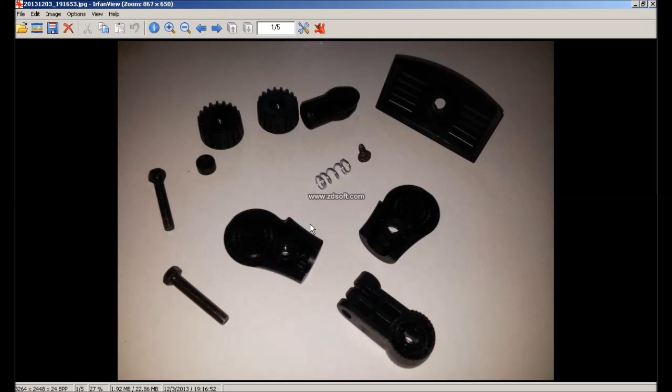So our top assembly here, as shown in this image. So we have these components for our top part assembly: a right gear connector, left gear connector, middle gear connector, bolts, a cap, a spring, a compression spring, a screw for this mounting plate, a mid slot, and two knobs here.

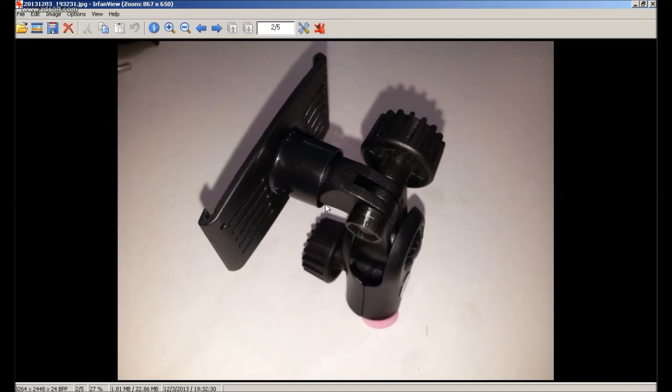So this is the view for the top part assembly. This is another view. So we have an assembly of the top parts. Inshallah in this video I will show you how we make an assembly for the top parts.

So as usual, we open our SolidWorks. When we open a new document, we go for assembly, then we click OK. When we open a new file for our assembly, initially we've got to insert our main component first.

Before that, let me show you the image for our assembly. Since at the bottom here we have two casings, left gear connector and right gear connector, I will use the right gear connector as our base component. So this will be our first component in our assembly.

The first thing I should do is insert our component. The first component will be our right gear connector. So this is our right gear connector. Since this is our base component, we don't click it on the screen, we simply click OK. So this base component will be put into the origin point of the SolidWorks assembly file.

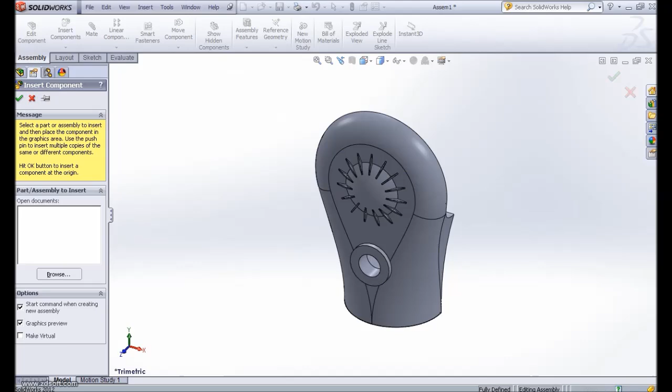The next thing to do is we insert all the other components. The next component will be our left gear connector. So let me check, we have a left gear connector here. So I put it somewhere around here, until we get all the components inserted as shown in this image. Okay, we have all this component, we will insert all this component.

In this video session I will not show you the compression spring now, I will show it during the assembly process, how we create a new file called compression spring so it can be nicely fitted into the assembly. Okay, so we've got to insert the other components.

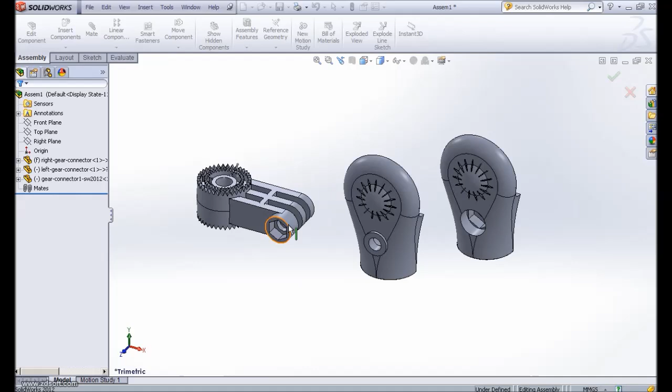After I've inserted the components, firstly my first step is I insert only 3 components first, the 3 components relevant to our initial assembly. After we have inserted these three components, let me do some assembly for these 3 components.

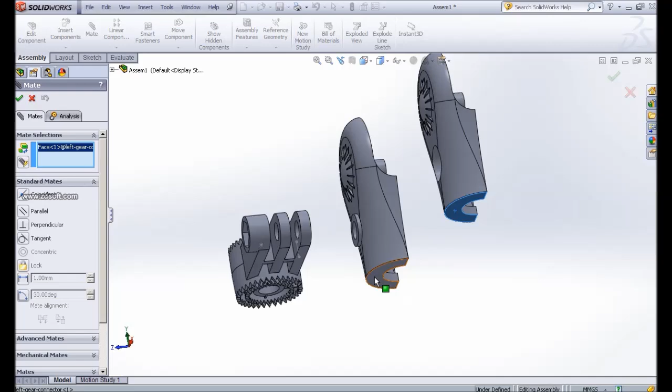Since our right gear connector here is my base component, what we will do is go to mate, then select these faces of this left gear connector and this right gear connector. Automatically SolidWorks will set it into coincident, meaning the bottom surfaces will be on the same plane. So then we set it first.

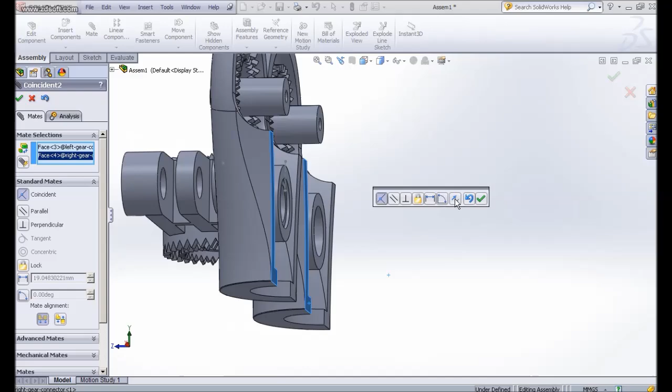The next mate setting will be, I select this vertical face of the left gear connector and this vertical face of the right gear connector. SolidWorks will set it automatically to coincident, but we also need to click the flip mate alignment, or we can click anti-align. What I will do is click flip mate alignment, so both components will share the same horizontal and vertical plane, and this component is now flipped into the right position.

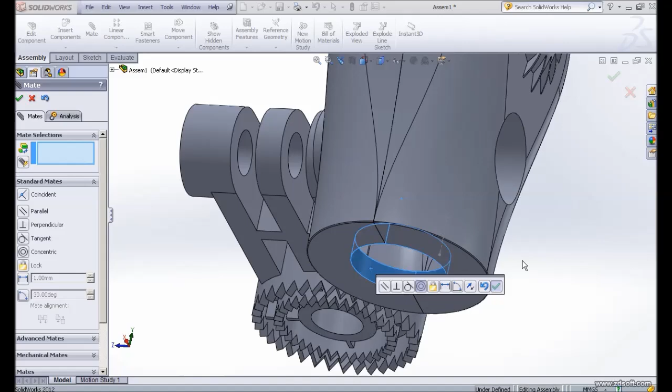Then I click OK. My next setting is I select this cylindrical surface here and the surface of our right gear connector, so automatically it will be set to concentric mode. Then we click OK, and our two components here are assembled into the right position.

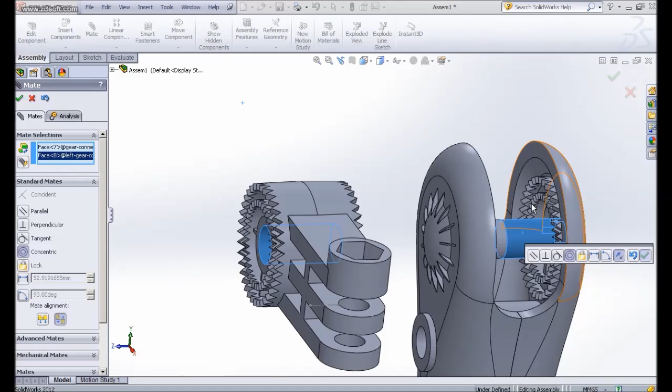Okay, next when we zoom in, here we have our middle gear connector with external teeth. In our casing, the right gear connector has internal teeth, internal gear. So we've got to mate this gear teeth to the right position.

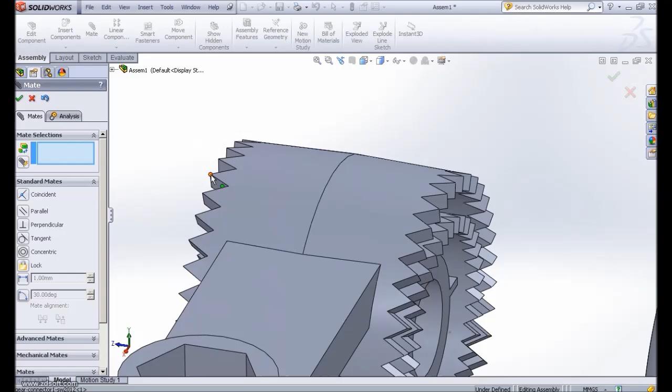So for this middle gear connector, I will select this point - not the edges, but the vertex, the point. This point is at the peak, not at the bottom of the gear. If we zoom closely to this gear, let's put it at this point, so it will be in this vertex.

Automatically it will put into coincident, so the gear will be in the right position there.

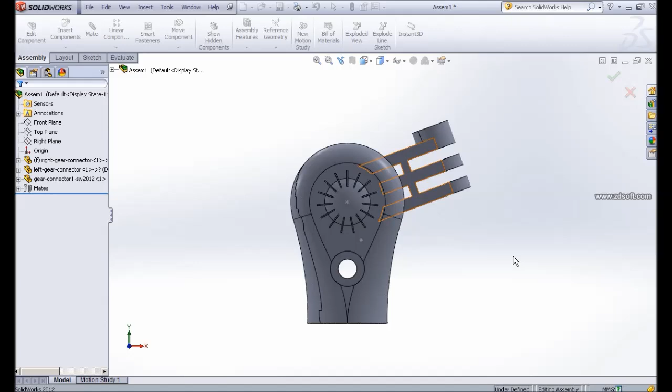Let me go to isometric view, so I can check whether I'm satisfied with this position. Alright, it seems like this position is good enough. We click OK, then go back to isometric view. So our middle gear connector is mated with both components.

Since I haven't made this spring yet, I'll show you how we create a new file. This is another approach of doing assembly - sometimes you don't have to finish all the components. Maybe certain components like the compression spring here, you can do later after the assembly to make sure our components nicely fit.

To show you how I do that, with these three components, if I go to section view, click this button for section view, select right plane, then click OK. Now we have our section view of these three components.

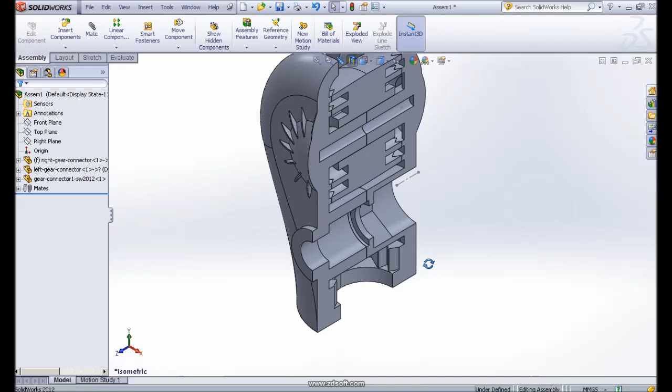If you look closely at this part, this is the casing for our right gear connector, this one is for our left gear connector. So what I want to show you is that our spring will be fitted into this area - we have an internal bore here, so it will be nicely fit into this area, since the spring will be kind of compressed - it's a compression spring.

So in the assembly, since I haven't made this spring yet, the first thing I should do is ensure the spring is nicely mounted between this surface and this surface here.

In this assembly we have a tab button, the evaluate button. So what we do is go to measure first. We need to know the length from this point - we can select this endpoint, not that one, let me clear this and do it again. This vertex here, this vertex to this point here.

So the distance that SolidWorks shows us is 8.5, as shown here. The distance is 8.5 mm. So it means we can create our spring - the length of our compression spring will be 8.5 mm.

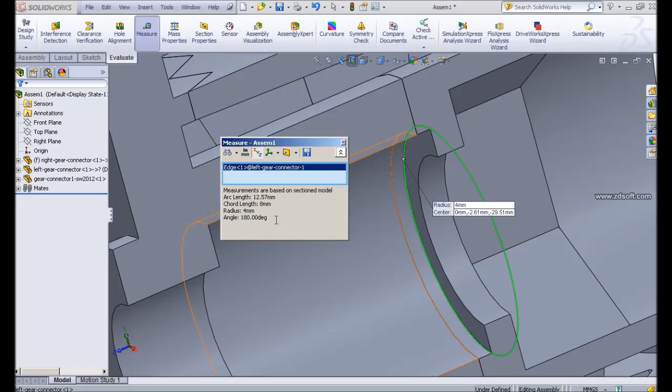So it will be nicely fit into this bore area here. The diameter of the spring should be at least not more than 8 mm, and the length should be not more than 8.5 mm.

So what I'll do then is go to a new file here. We open a new part, a new part file.

Then we will do the spring, the compression spring. So this compression spring, what I will show you how I do it. So in the front plane, I will not use the helix command for this. What I will do is I use sweeps.

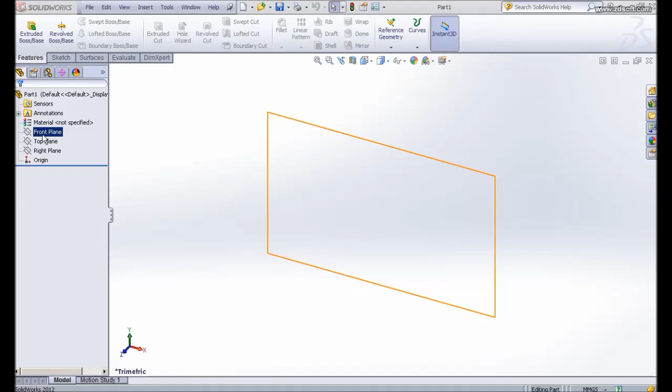In the front plane, I make it active. So in this front plane, I go to normal view. So I do some line here. This line is for me to make the path of our compression spring. Let me drag it somewhere around here. So I put the dimension to make sure that the dimension of my line is 8.5.

I will not do 8.5 in this case. I will do 8, okay, 8 mm. I will explain to you later. 8 mm, so 8 mm is our compression spring path line to make our compression spring. So click OK. So I have one line here.

So let me exit here. Then I add another front plane, another sketch plane there. At this sketch plane, I will make the wire diameter of the spring by using a circle. Let me go to normal view. Let me zoom closely, so carefully we...

From this point that I put it, a circle there, and put a dimension on the wire of the spring. The wire diameter of the spring I put it as 0.5 millimeter for the wire thickness.

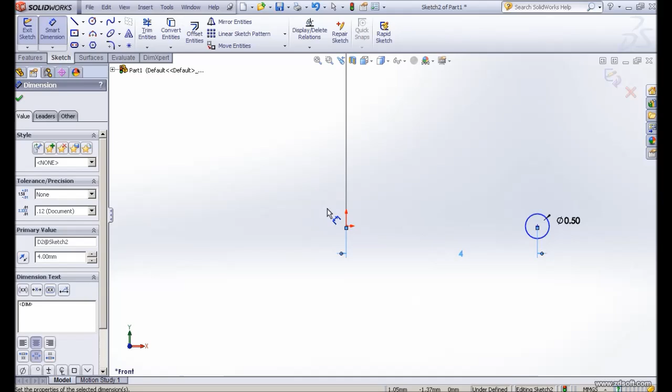So then we have another, the cross section for our profile for our spring. Okay, to do the spring, then I exit the plane. Then the next thing to do is on the features we have a swept boss base here. Since this cross section is already selected, so it's in here. So for the next settings here for the path, so I select this line.

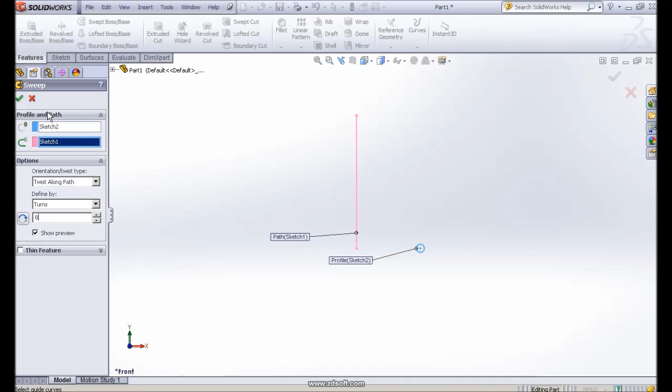Okay, when we do sweep, so this is our path, so this is our cross section. We have some options, I use the option for twist along path. So the next setting is defined not by degrees, but by how many turns. So in this case, let me put it, let's say about 8 turns. So it will show you preview there about 8 turns. Okay, we have a revolution there.

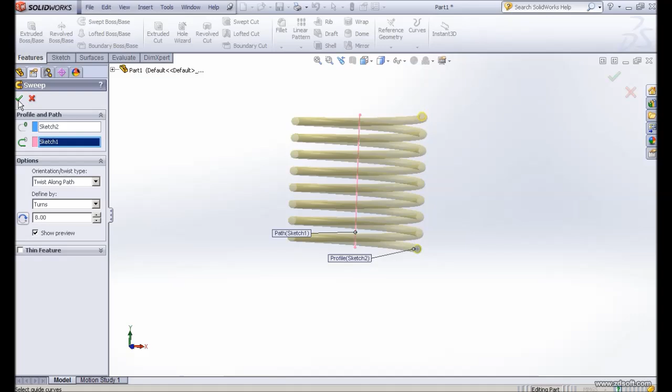Then we have our cross sections, it will do a kind of helical spring. There's another approach for you to do a helical spring, okay, let's stay on with 8 turns. Then I click OK, and now we have our compression spring there.

Okay, so another thing to do is before we put this component into the assembly, this path, this center line is meant for the sweep, so we got to add on the front plane or the right plane, another sketch plane. This sketch plane I make it normal view. So this sketch plane is for us to do the axis for the spring.

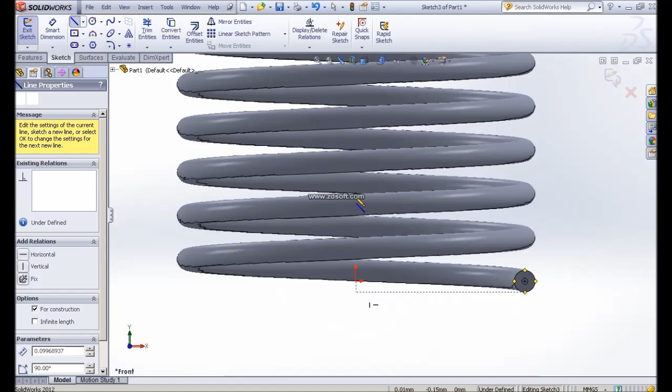So if I go to center line, make sure that the axis is in the center as this origin point, but the starting point is coincident with this quadrant, the bottom plane of the spring. So I start at a point, then I zoom out, until the axis here is coincident with this top plane of the spring.

Make sure that we are on the right line here, make sure it's snapped, make sure that it's vertical. Then we click OK. So this center line will become the axis of our spring. So this axis will be used for our mate setting in our assembly.

So then let me check the dimension here. The dimension of this axis is 8.5, since we have 8 plus 0.25 of the radius of the wire, so the total length is 8.5, right? So I don't have to put a dimension here, just to check. So our total length of our spring is 8.5. So now we have our spring.

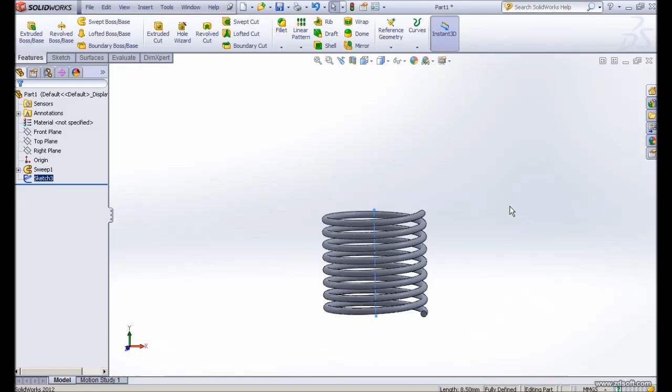Let me save this component as spring for gear connector. Let me put it as gear connector 2, since I have the original file. Spring for gear connector 2. Okay, now we have our file. Then let me close this part modeling.

Okay, now in our assembly mode here, let me insert, we go to assembly, we insert, okay, I got to browse again, spring for gear connector 2.

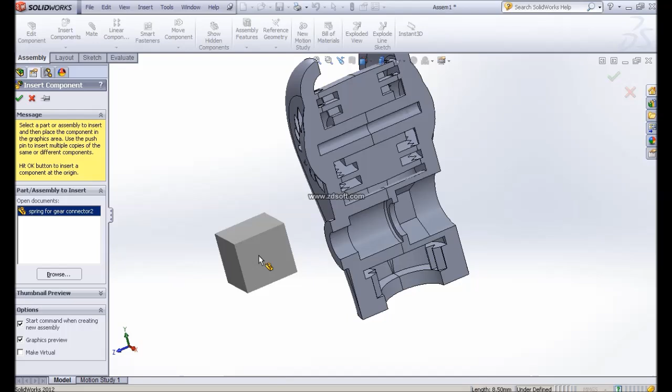Let me put it somewhere around here. Since we have inserted this spring component here, this portion, since we have turned on the section view, our spring has been in section view. If I turn off the section view, our spring is there. Let me turn it on again. Let me click OK.

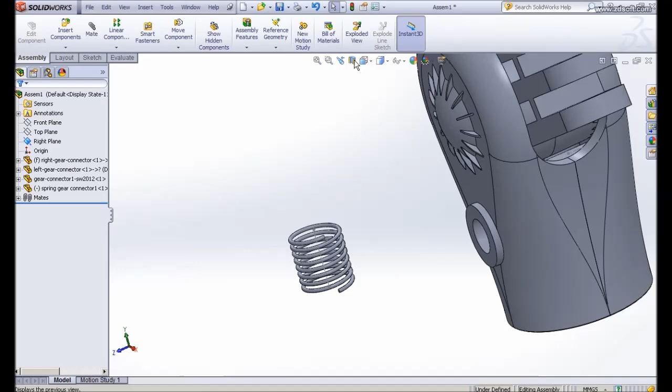Let me put it, let me turn on again my section view to adjust it, so that we can... let me turn off first the section view. Let me put it into position first, then later on I can turn my section view on again. What after we have inserted our...

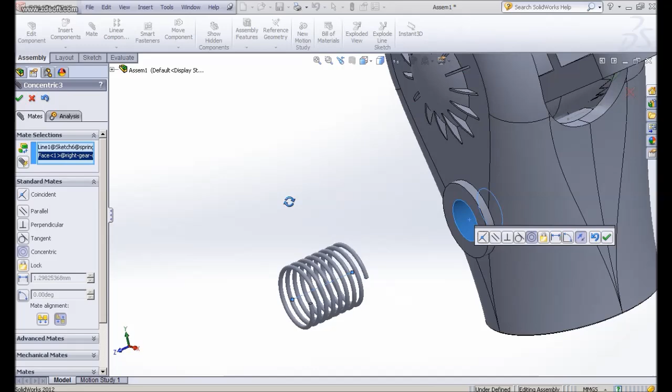We have inserted this spring component, then we go to mate. Since in our spring file we have an axis here, we can use this axis as our mate selection. Then we select the bore here. Make sure that it's not coincident, make sure it's concentric, so that it will share the same center point there. Then we click OK.

Now let me turn on my section view. If I click OK first, then turn on section view, so I can nicely fit the spring inside. Now we have our spring in initial position here. So we need to put this spring inside this internal area here.

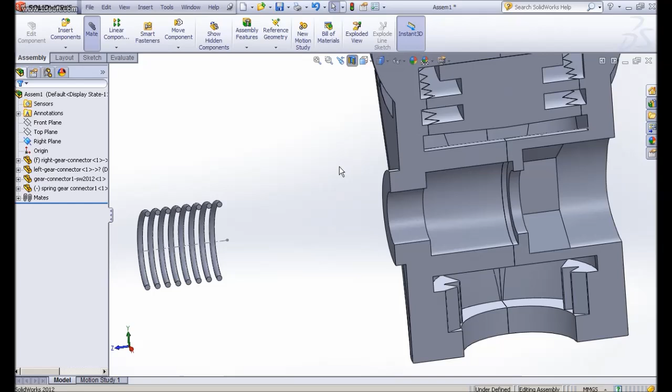So what I can do is click mate, select this endpoint, or either endpoint here of the spring, and this internal surface here. So it will be set to coincident, so the spring will be directly in position. So we have our spring there. Click OK, now we have the spring there.

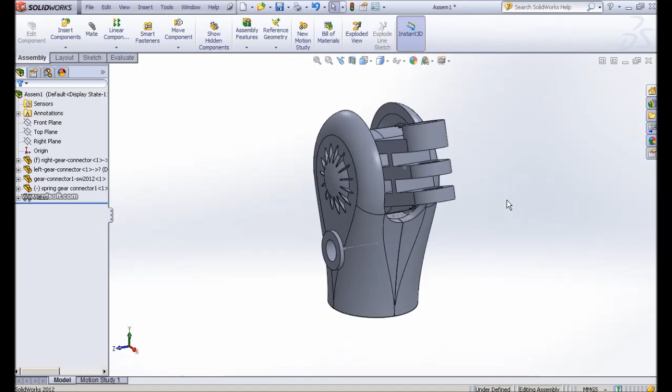Let me turn off the section view. Now I have the completed assembly of 4 components. Let me save my file. Let me call it top assembly tutorial 1.

Since in this image we have another component, we already have 1, 2, 3, 4. We have another more - we have bolts here. We have all the other components left, and then we've got to insert them. We've got bolt, we have bolt here.

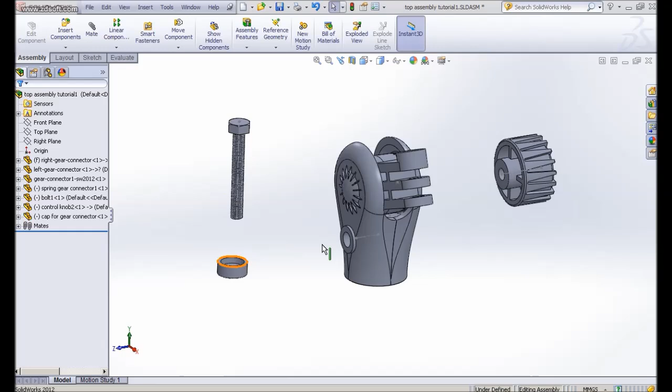Let me continue, I'll make it short. I already inserted 3 components. In this video session, since my laptop is taking memory, I will do it part by part, inserting only the relevant components first. So this is our bolt, this is our control knob here, and this is our cap for the casing here. Okay, we have a cap.

The first thing I should do is position the control knob. This control knob will be mounted on the surface in this position. So let me go for mate, then I select this surface, and this surface. Make sure it's not coincident. We set it first into...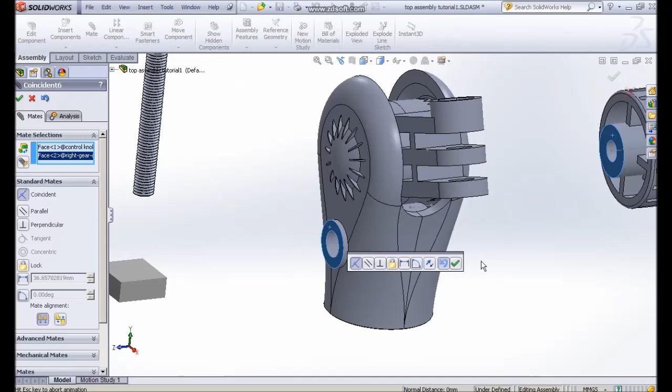Let me go... let me undo it again, redo it. Instead of that face, let me select this cylindrical surface, or the internal hole surface there, and the hole surface here. Make it concentric.

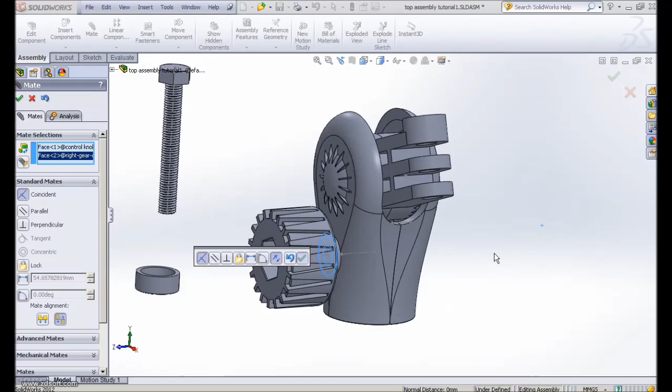Before we go to concentric, we've got to click the flip mate alignment, so the knob would be in the right position. Then I click OK. So the next mate setting will be this face and this face. We set it to coincident. Then we click OK. So the knob is there, in position.

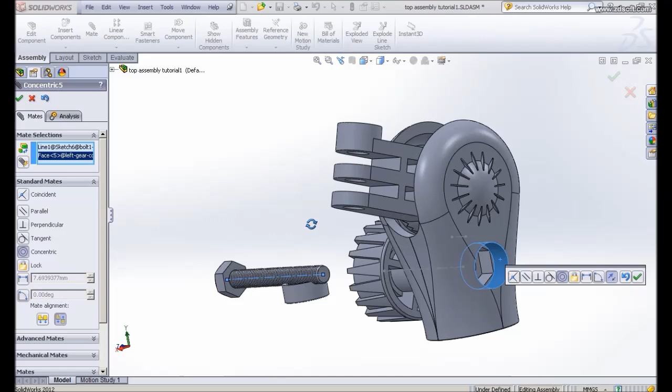The next component will be the bolt. Since the bolt is the same as the spring, I already prepared the bolt with an axis. We select the bolt axis here, and we can use either the hole here or this surface. Make sure it's not coincident, make sure it's concentric, so that the bolt will share the same axis point there.

We also must make sure that, if you look at the orientation of this bolt, the surface of the hexagon bolt head, and the surface of the hole of this control knob, is not parallel. So let me click OK first.

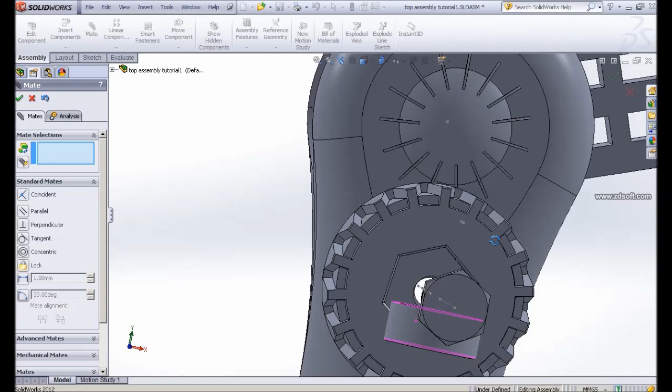The next setting will be we select the face of this bolt, this face of the bolt head, and the face of this hexagon hole here. Make sure that it's in a parallel position, and we click OK.

So the next mate setting will be... sorry guys, my laptop is very slow. It's not even an i3.

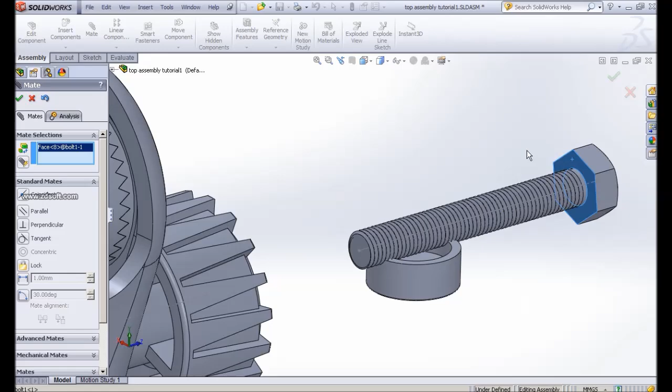Okay, we select our next settings, this face, this face, and this face of the control knob, then we go to coincident. So the bolt is in the right position.

So the next component will be our cap here. We have a cap. Let's click OK first, so that it will not undo everything.

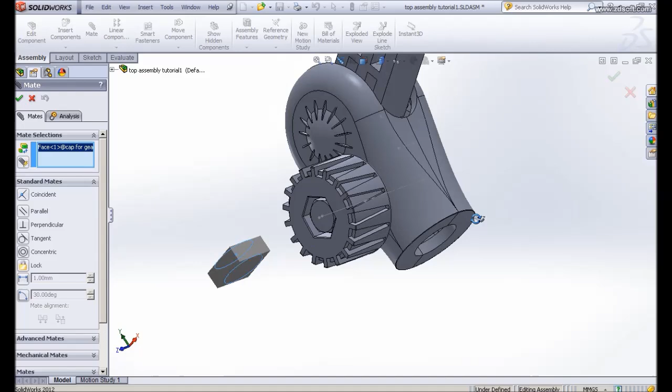Okay, I click mate again, then I select the cylindrical surface of this cap and the cylindrical surface of this casing. Make sure it's concentric. Since the cap is facing the wrong direction, I must make sure that we click on the flip mate alignment.

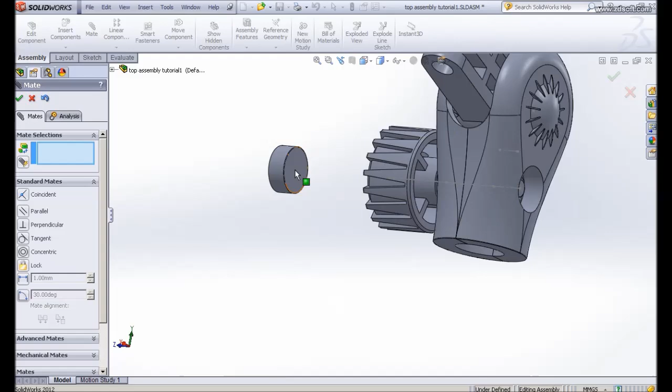Then we click OK. So the next mate setting, we select the face of the cap, this cap and this face, so it will directly put into this position. Okay, then we click OK. I think we have assembled this component. We click OK first. Let me go to isometric view.

Let me save this assembly file. Since it looks like our component is in the right position, but we got to check. This is a method of checking.

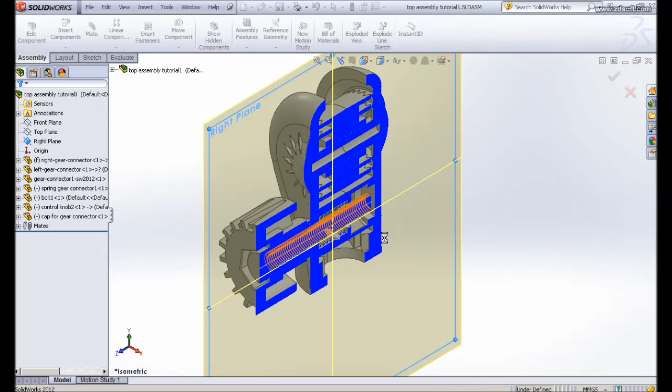If I go to section view, then if I click OK here, I think we have some issue here. Okay, we have some issue here.

So the issue is that in this section view, it seems like we have the bolt with an external thread. The thread of this bolt is not in mesh with the internal thread of this control knob.

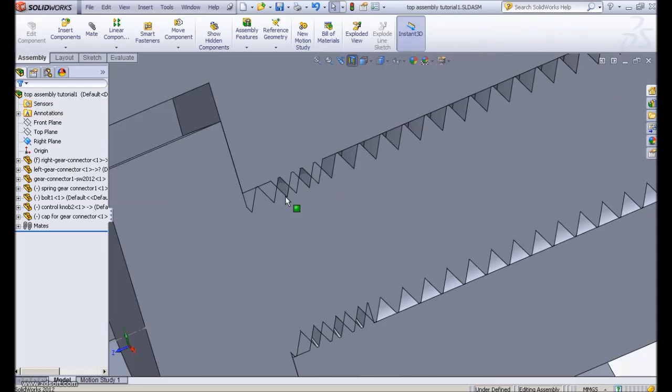So if you zoom closely, it looks like there is some kind of cutout or intersection here. The bolt thread and the internal thread of this control knob is not matched. So we need to do some adjustment here.

Okay, since I've already set the surface of the bolt to be parallel to the surface of this bore of this hexagon, so I cannot drag the bolt. So I need to check again my mate setting here.

If I select this surface of this bolt, and click at this bolt under mates in our top assembly, we have a parallel setting there. We have a parallel setting for our mate.

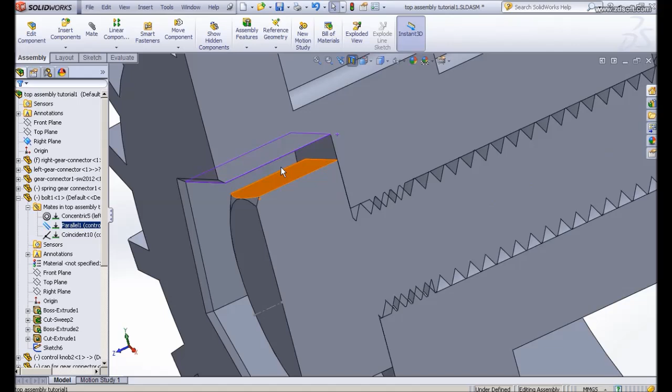This face and this face is in parallel mode, so I need to delete this setting. I need to delete that setting. So I got to do some adjustments. So if the setting of this mate has already been deleted, it means that I can rotate my bolt.

If I move it slightly, our bolt into this position in this section view, it seems like the thread of this bolt nicely mates with the internal thread of the control knob there.

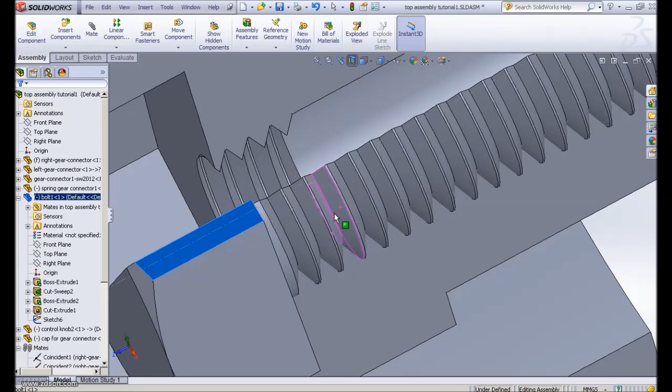So in this position, it looks good if I turn off my section view here. Since we have slightly adjusted our bolt, then we go to section view, click OK just to check.

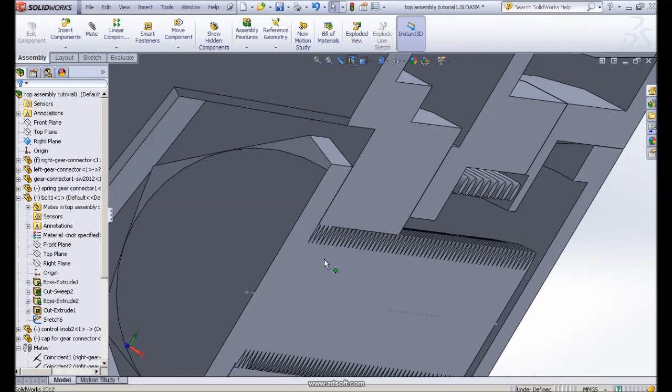Just to check to make sure whether there will be interference there inside this. Let me pan it.

Okay, it seems that we have put the bolt into the right position, so we don't have any issue here where there would be some cutout. Okay, so this is one way to do it.

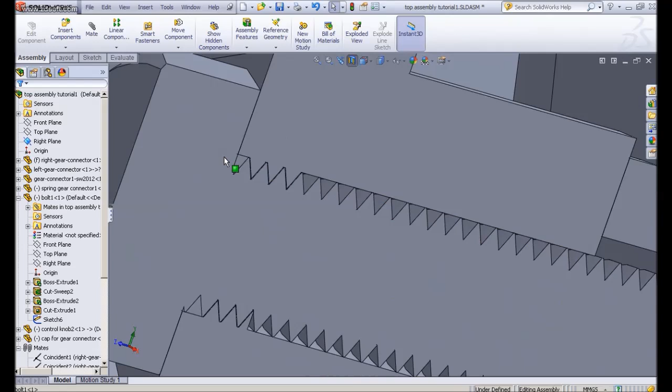I think I would suggest that the best way is you open back your part file. For this case, your control knob where you have your internal thread. So when I did this part modeling for this control knob, I used this bolt to be cut out by using subtract, so we have my internal thread.

So you look at the location of your bolt, which face meshes with which face, the orientation of your bolt when you do the cutout subtraction in your part file, in your component file. So it seems that my approach here is okay.

Then let me turn off the section view. So I think the bolt is in the right position and orientation, so our bolt component is attached there. Okay, we have our component here. Let me save first my assembly file.

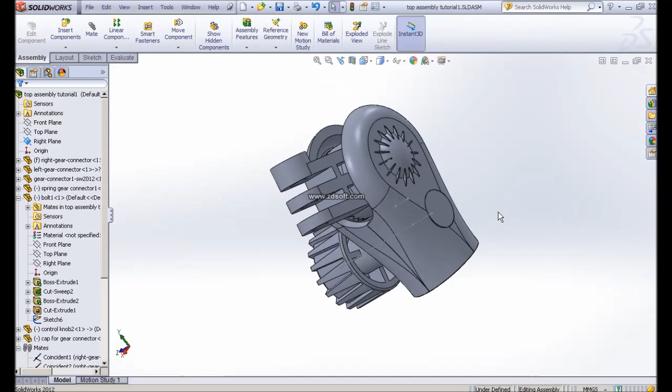Okay, let me turn this off. Let's go back to our assembly file. Okay, then we got to insert another component.

Okay, after we inserted all the components here, so we have bolt, mid slot, screw for this mount plate, and we have another control knob here. This control is the same.

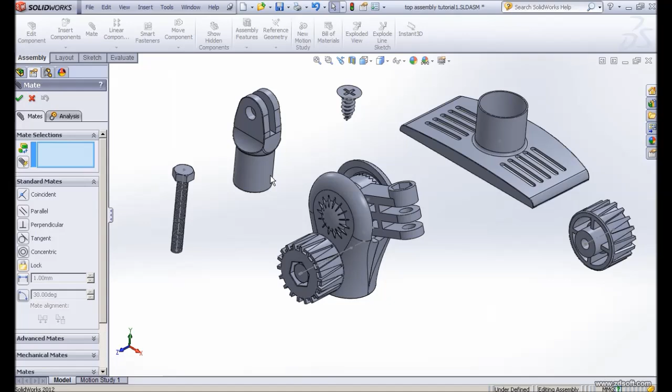So first thing we should do is attach this mid slot here, so we do another mate. This mid slot will nicely fit into this two slot here. So I select the face of this mid slot and the bottom surface here, and it will put directly into coincident position.

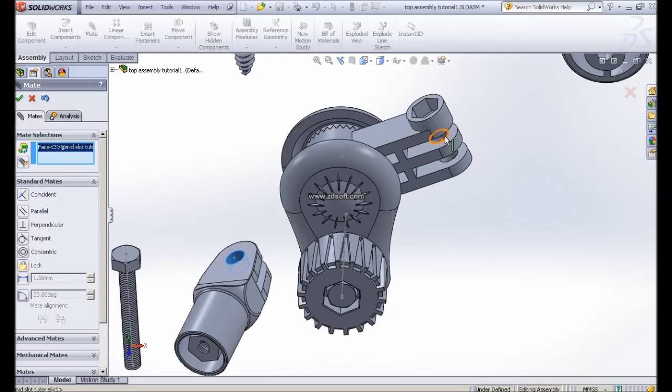It means if you look from this view, it will be in the same plane there. Let me click OK. Then another setting for our mate is we select the bore of this mid slot, and the bore, carefully select... let me delete it.

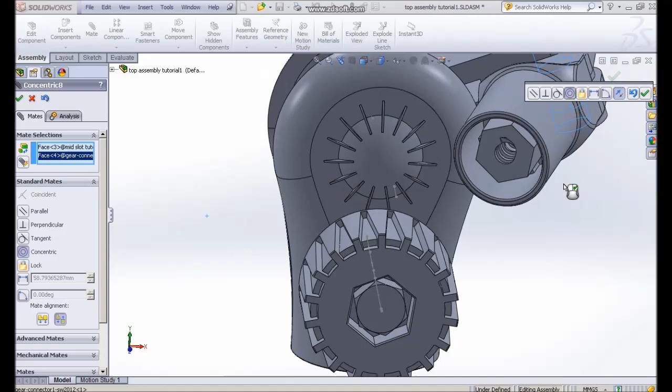Let me undo it again. Since we have this face already in coincident position, we select the bore, this bore, and that face. So the mid slot would be in the right position. Make sure it's concentric, so it shares the same center point. Okay, then we click OK.

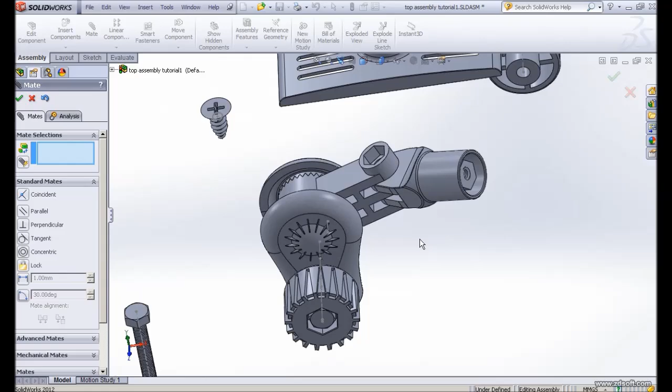Then we click OK. Then we can simply drag this mid slot here. We can drag it around since we don't have any constraint there. But in this assembly, we want to make it look nice in our 2D drawing, orthographic. So we need to put the slot into same alignment with our gear, middle gear connector here. Initially this slot is in an angle position, so we need to make it straight.

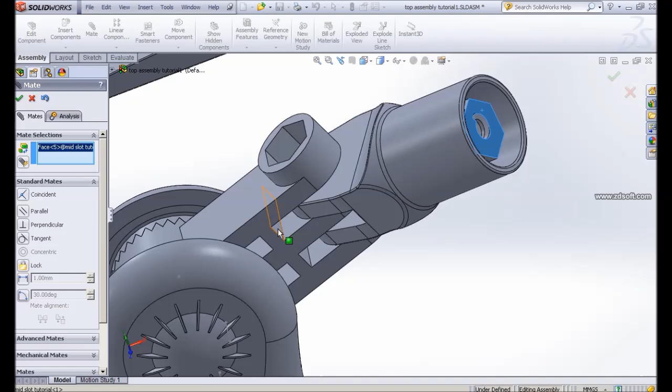One way to make it straight is to set another constraint here. I can select the faces of this second part here, and the vertical faces of our gear connector. We just select make it parallel. Once in parallel mode, if we look from the top view, it will be a nice straight line, in line with the middle gear connector. Then we click OK.

Alright, let's go to isometric view, and I save this first. Okay, let me click OK for mate setting, then let me save this file.

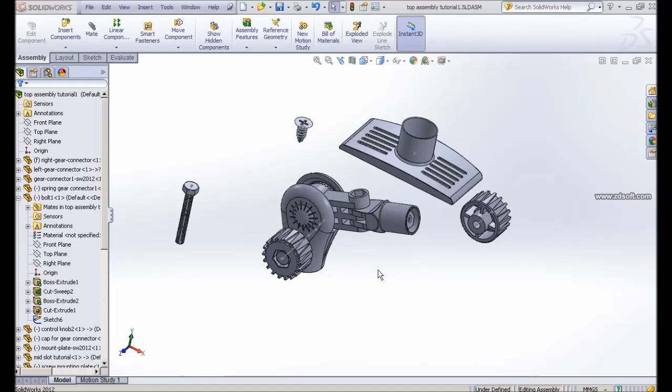Okay, our next mate setting will be we have a bolt there. The bolt will go pass through here. Okay, if I zoom it closely, so what we need to do is select the axis of this bolt, and we can select the cylindrical surface here.

Oh sorry, I didn't click at mate first. We click at mate first. Select the axis of this bolt and this cylindrical surface. Make sure it goes into concentric. Okay, concentric, so the bolt is in the right position there. Just to make sure again, another thing to check is...

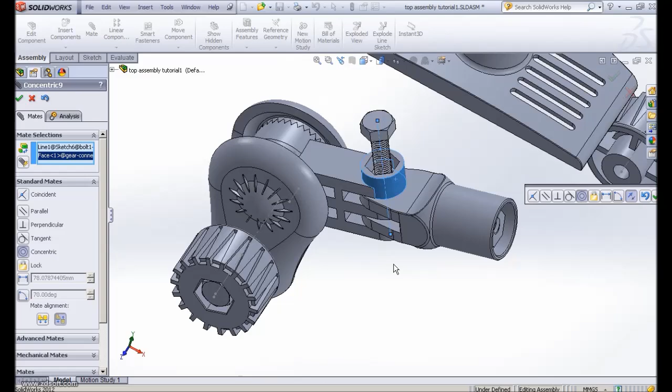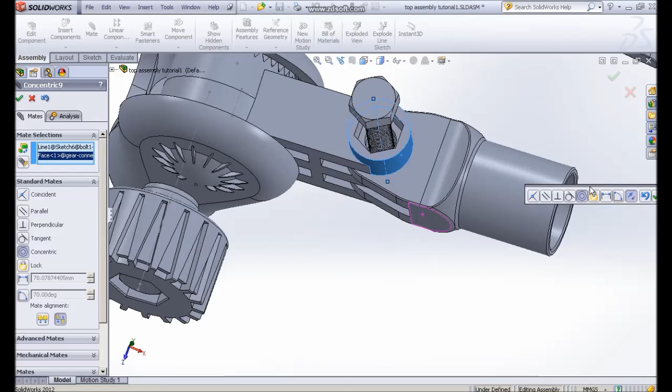It looks like our bolt hexagon head and the hexagon bore of our mid slot are in the same orientation. Okay, in the same orientation. So let me click OK first. So our mate setting will be this face. Let me zoom it.

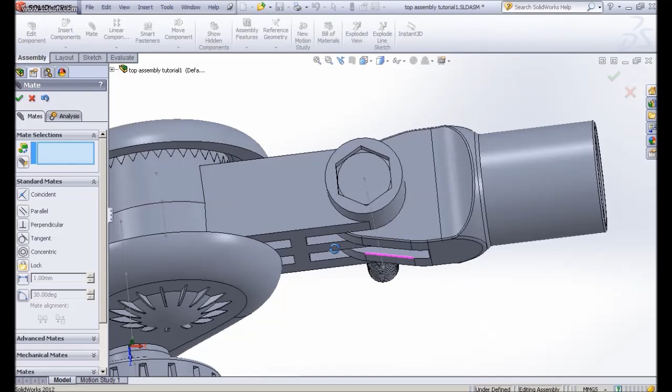I select this space, and the bottom face of the bolt head, so the bolt is attached and nicely fits into this mid slot. Okay, so we have the bolt there, and then we should put our control knob here. Okay, let me click OK first.

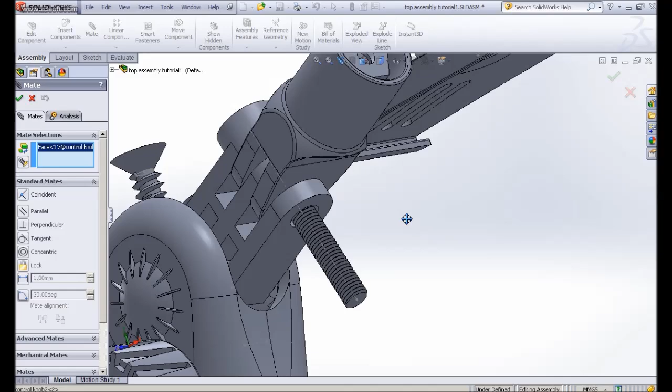Okay, the next thing, we have our control knob. Then we go to mate again, and we select the bore surface of this control knob, and carefully select the bore of this, using this cylindrical surface. Okay, so then make sure it's in concentric. Okay, so it seems like the knob is in the right direction, and also concentric, meaning same center point there. Right, so then I click OK first.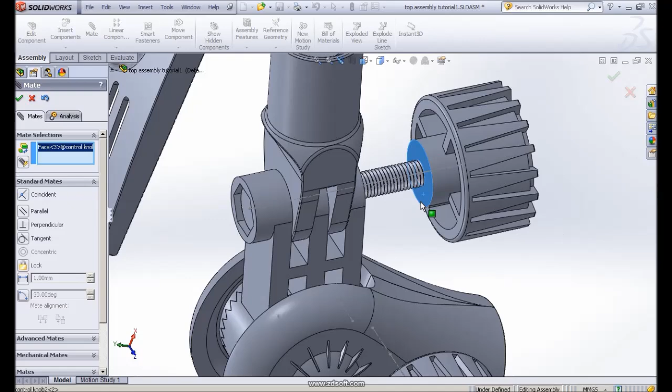So the next mate setting will be, okay, this face and this face should be in coincident. Then we click OK. Right, so we have our almost finished assembly.

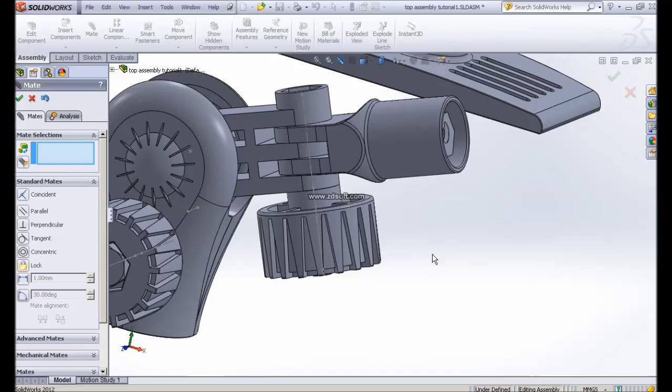Okay, we have our knob there, and what's left is these two components. Just a reminder, let me click OK first. We got to check whether this knob thread here is in the right position, same approach as before, where we need to check whether the internal thread of this knob is really mated with the bolt's external thread. So let me go to section view.

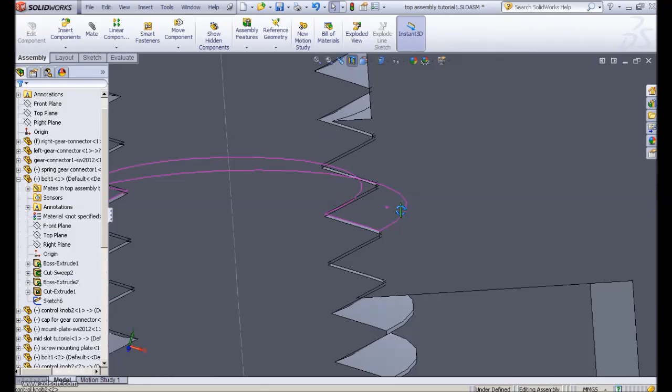Okay, it seems that our knob is not in the right position. The internal thread of this control knob is not really positioned where the external thread and internal thread align properly. We have some issue here. If you look, there's some intersection cut out there.

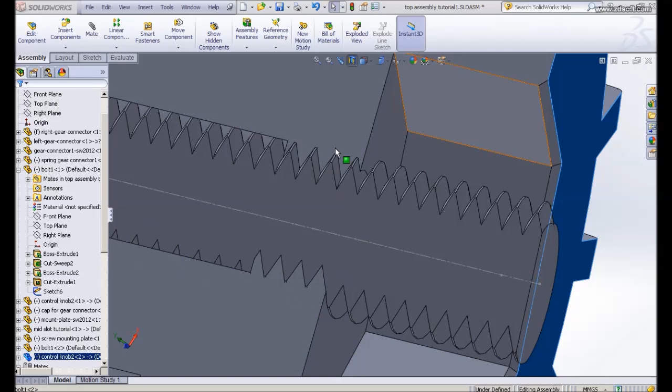So we need to adjust, same approach as before. We need to slightly adjust the position of this control knob. I'll make it short in this video: after some slight rotational movement of this knob, it seems like the thread is now nicely fit into the internal thread of this control knob.

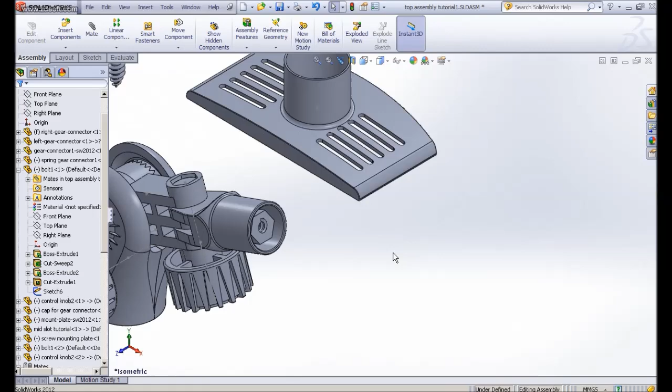Okay, let me turn off the section view. So we have our control knob there. So what's left now, let me go to isometric view. So the next thing is our mount plate.

So we click mate, then we select this cylindrical object here. With this cylindrical object, it will automatically set to concentric, but we got to click flip mate alignment. Okay, we flip mate alignment, then I click OK. Then it seems like we got to push this mounting plate a little to the side, so we can do another mate setting so it fits nicely there.

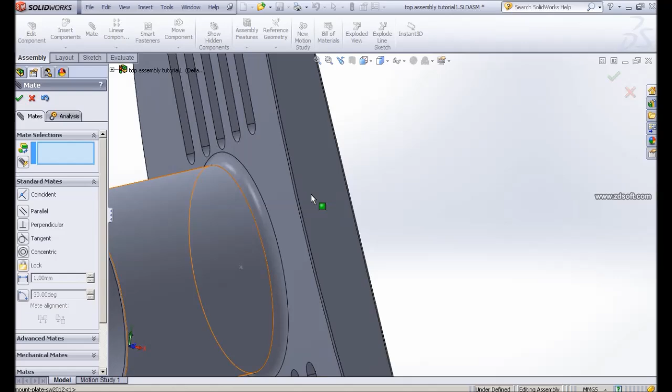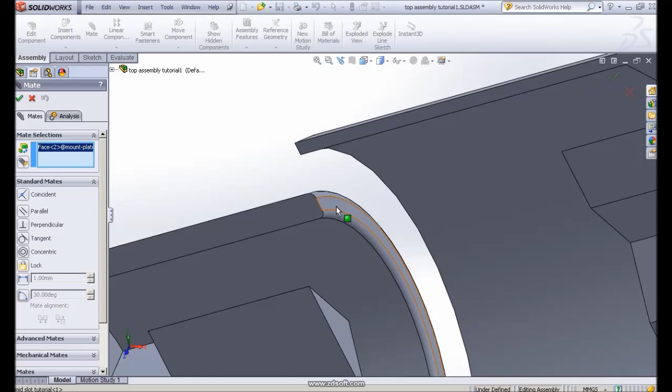This surface and this surface here of the mid slot - I think we are in the right position here, with the mount plate in the right position. So this is our correction, sorry for that. Okay, so the mount plate is in the right position, then I click OK. Alright, then let me save the file first.

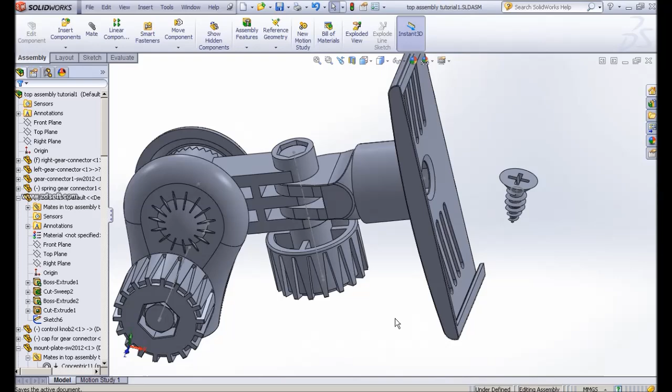Sorry guys, I think this video session is the longest one I've made. It takes, I think, about, we already passed the 1 hour limit. Sorry for your patience. Be patient guys, okay.

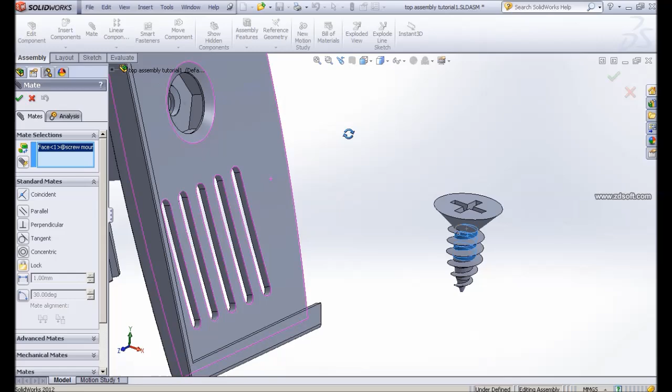Now is our setting for our screw. Okay, so we go to mate, then we select the cylindrical surface of the screw. I can use this cylindrical surface, make sure it's in concentric position. We click OK first, then we select another mate - this top face here of the screw and this top surface here, so the screw will fit nicely into position.

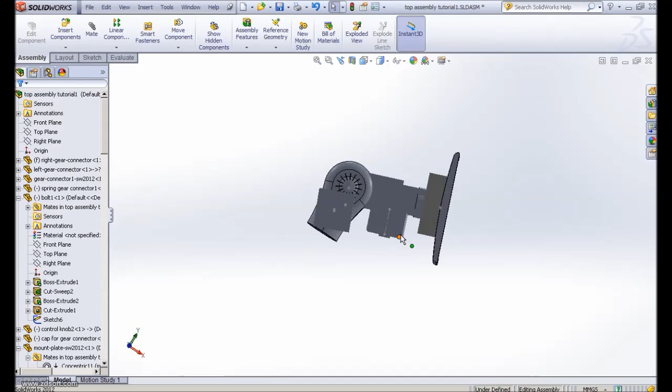Alhamdulillah, I think we have almost fully done this, since this video has passed the 1 hour limit, and thank you for your patience watching this video. The purpose of me doing this video was just to guide you guys for doing assembly modeling. My approach is not the best solution, so I think you guys have better solutions for doing this. I think this video is meant only as a reference for you guys to do your assembly modeling in SolidWorks. So I try to make it short.

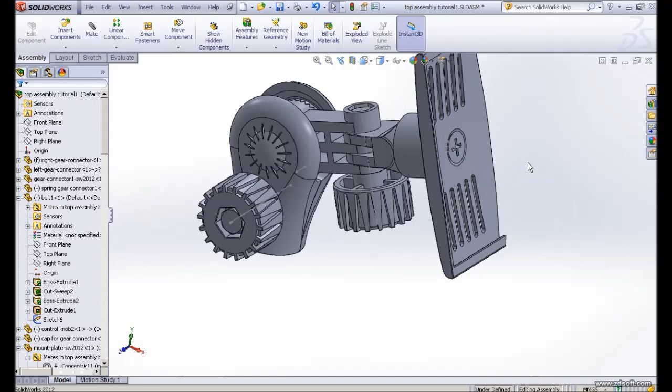Maybe, as shown previously with this knob, there's the same issue between the thread of the screw and the internal thread of this slot component. So we got to adjust the screw position a little bit so there's no issue of the external thread and internal thread intersecting each other. I think I'll end this video for this top assembly at this point.

Okay, I've previously shown you the bottom assembly. So this is part of the assembly of our project.

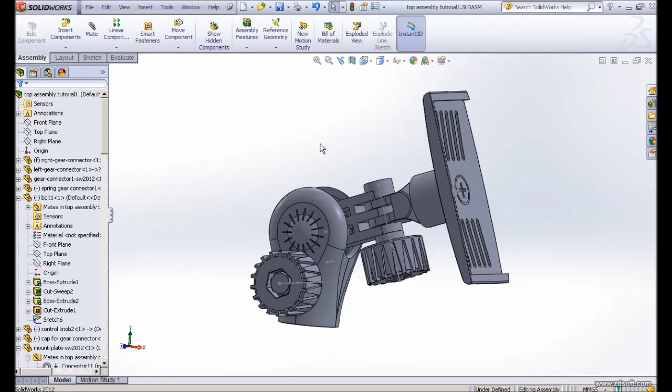Alhamdulillah, we managed to finish our top assembly. We managed to assemble all the components here for our top assembly. Alhamdulillah, so I think you guys, inshallah, can do even better than me. I will be seeing you guys on the next video session for our full assembly.